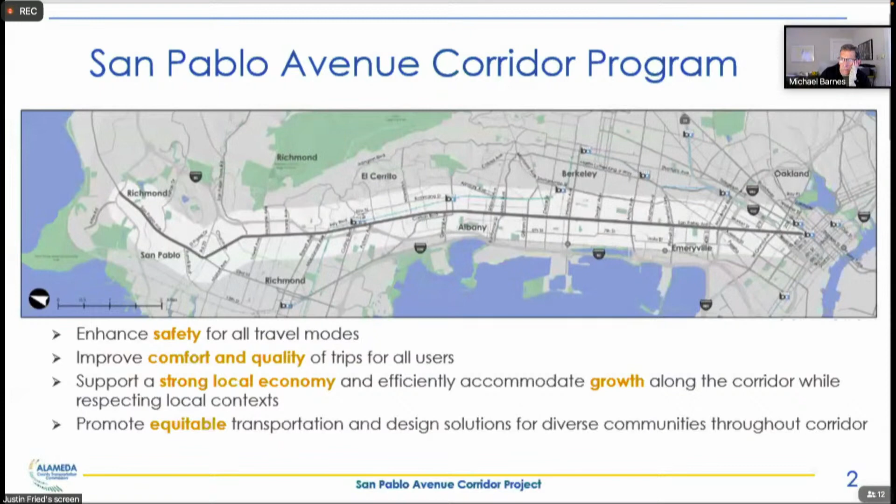So for a variety of reasons, San Pablo Avenue corridor has been a focus for Alameda CTC dating back to 2017. And Alameda CTC embarked on a bi-county corridor planning effort at that time. It spanned several years, had the goals listed below to improve safety, comfort, and quality of trips, support economic development, and promote equity. And this was a significant effort, involved visioning for the corridor throughout both Alameda and Contra Costa counties, considering a variety of cross-sectional options for the San Pablo corridor, multiple rounds of public engagement with over 4,900 people weighing in, and in April 2019, there was a public workshop in Albany and at the City Council, which staff helped support. So, next slide, please.

Before you go on, would it be possible to lower the lights in the room so the screen is easier to see? Thank you. Much better, thanks.

And so within Alameda County, there are a number of agency partners that Alameda CTC is working with on the San Pablo corridor, 4 different cities, AC Transit, the transit operator, and then Caltrans. Next slide, please. And so this graphic illustrates coming out of the multi-year corridor planning effort, there were 3 near-term projects identified that collectively comprise the San Pablo Avenue Multimodal Corridor Program. These are within Alameda County, and they differ by jurisdiction or by section of the corridor based on local preferences from that corridor planning effort, as well as technical considerations. And in March of 2022, Alameda CTC's commission adopted this corridor concept in these 3 projects as Alameda CTC's near-term set of projects to deliver for the San Pablo corridor within Alameda County within 3 to 5 years.

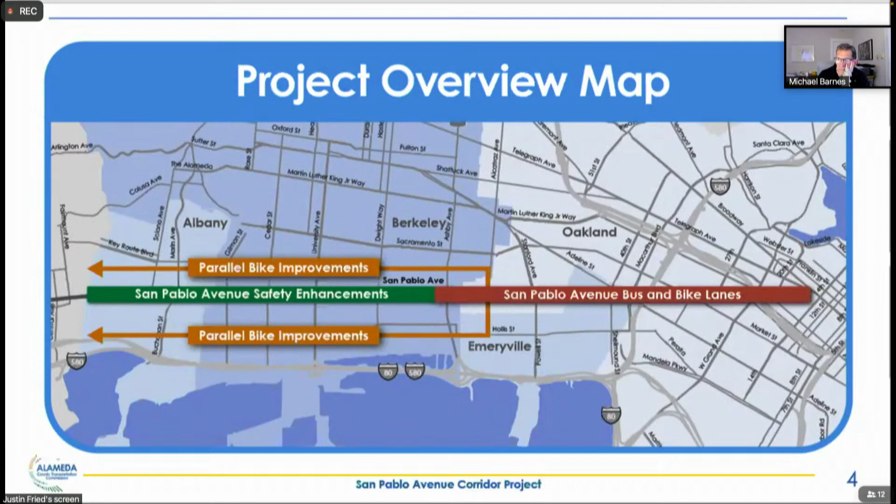And so at the southern end of the corridor, not within the city of Albany, the corridor concept calls for bus and bike lanes along San Pablo Avenue and repurposing traffic and parking lanes in order to put those on San Pablo through Oakland, Emeryville, and South Berkeley. At the northern end of the corridor in Berkeley and Albany, the proposed projects consist of safety enhancements along San Pablo to make it safer and easier for people to cross the street on foot and bike, as well as some targeted transit speed and reliability improvements. And then improvements to parallel routes to create continuous north-south neighborhood bikeway routes for all ages and ability cycling. Next slide, please.

And of course, this is not happening within a vacuum. There are a number of projects already underway at the local level across all of the different project jurisdictions. Within Albany, there are a couple listed here that touch the San Pablo corridor or the parallel bike routes. And so Alameda CTC's projects are coordinated with these, and we have either incorporated elements of the projects that the city had initiated and taken through concept planning, or in some cases, they're non-overlapping and they will work together to create continuous biking, walking routes.

Next slide, please. So I'll touch a little more on the scope elements of the 2 projects within Albany now, and just some of the details of the key locations within the 2 projects. So this focuses on the Safety Enhancements Project, which is, again, the project along San Pablo Avenue. And so this project's features include bus bulbs at AC Transit rapid stops to provide speed and reliability benefits for the buses and enhance space for passenger waiting.

Improvements at uncontrolled crossings of San Pablo Avenue. So there are a number of crossings with no more than a marked crosswalk today that this project would be looking to upgrade with pedestrian hybrid beacons or flashing beacons and median refuge islands. There are a number of locations where the project proposes to relocate bus stops from the near side of the intersection to the far side to improve the line of sight for oncoming motorists to pedestrians who might be crossing the street. When a bus is pulled out at the stop, it typically obstructs the line of sight for a near side crosswalk. At a number of locations, the project proposes to upgrade lighting at uncontrolled crossings so that pedestrians are not backlit for oncoming motorists.

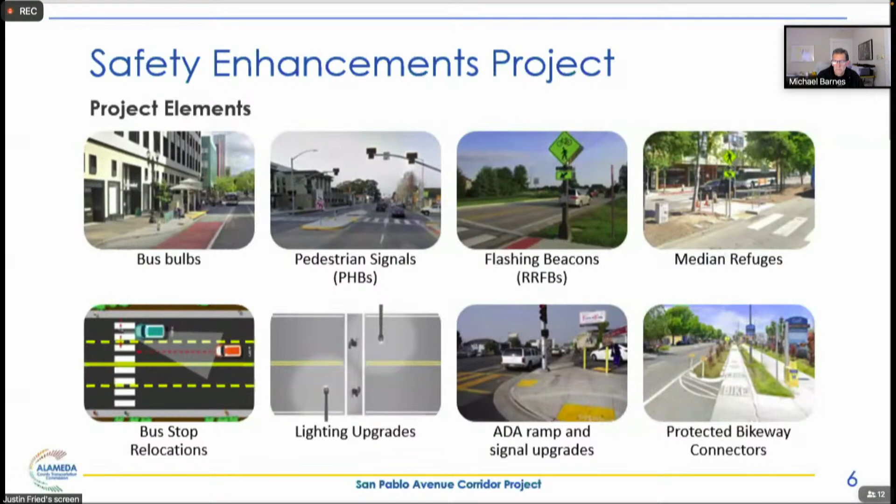Next slide, please. So I'll touch on a couple of the key locations here and just give you a sense of some of the design details of these locations. So this is the intersection of San Pablo Avenue and Marin. At this intersection, the project proposed ADA ramp upgrades, high visibility crosswalk upgrades, and then the project also includes elements to facilitate cyclists who are traveling along Marin Avenue accessing the existing two-way bike path along the south side of Marin, west of San Pablo.

So you can see in the figure a two-stage left turn box with a protected island to shield bicyclists that allows somebody traveling westbound on a bike along Marin Avenue to make that turn and get into the two-way shared use path along Marin Avenue in a comfortable way. Next slide, please.

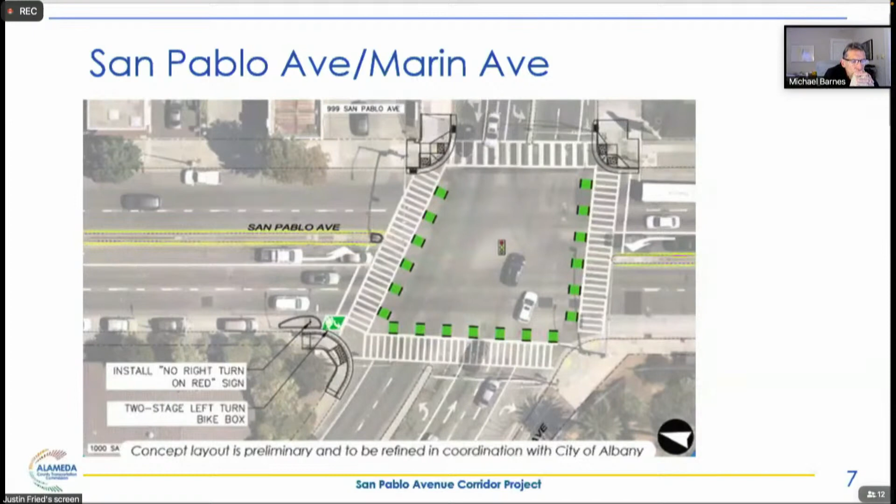This is the intersection of San Pablo Avenue and Solano Avenue, major intersection of two commercial corridors and a very high transit node, intersection of different transit routes as well. At this intersection, the project proposes ADA ramp upgrades with directional ramps where possible, high visibility crosswalk striping upgrades. And then this is one of the AC Transit rapid stop locations where bus bulbs would be constructed as part of the project. One of the key details with respect to the bus bulbs is exactly how long they are. There's a trade-off between length of stop, which provides operational flexibility for AC Transit, and parking.

And so we did do outreach to all of the different businesses here, and also in talking with AC Transit, there are some existing issues of the stops not being long enough, which results in buses sticking out into the intersection along Solano when multiple buses arrive simultaneously. And so based on the outreach and technical considerations, the bus bulbs are proposed to lengthen the stops, removing 2 parking spaces in each direction to provide more length of stop and address that issue of buses getting stuck in the intersection.

But I'll note this is somewhat of a compromise between the maximum length of stop that might be desired to consider all possible scenarios of future articulated buses running down the corridor. So we're really trying to balance transit operations and parking with this location. Next slide, please.

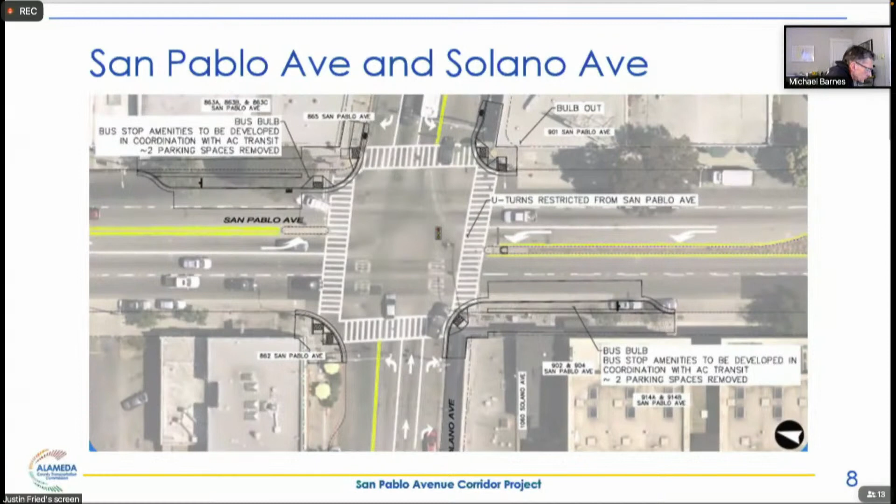So this is the intersection of San Pablo Avenue and Washington Avenue, and this is an intersection that the city has previously studied and the Transportation Commission has previously reviewed. And so the Alameda CTC project does incorporate a design based on past city planning and design work and direction from this Transportation Commission, which involves signalizing the east leg of Washington Avenue. Currently, one leg is signalized and one leg is not.

And then marking bike crossings and implementing signal phasing so that bikes who want to travel east-west along Washington Avenue but need to travel this short distance along San Pablo Avenue to make the connection can travel in phasing where they are not mixing with mainline San Pablo traffic.

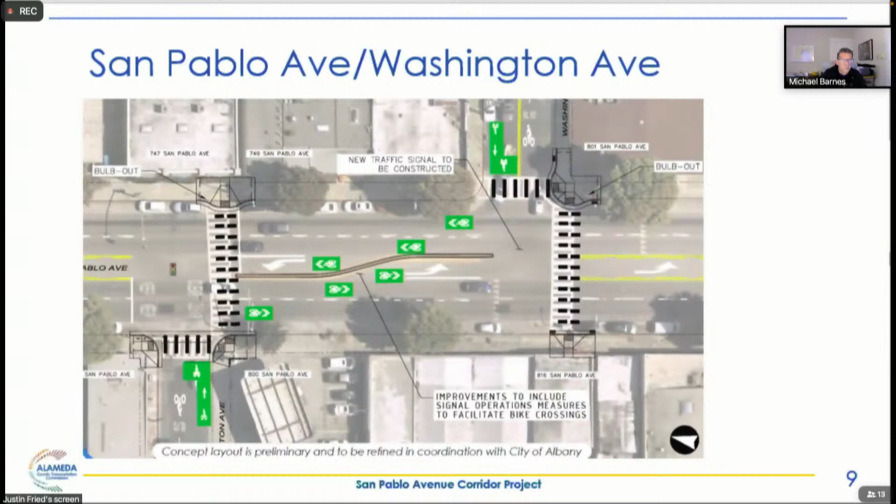Next slide, please. This location did generate a significant amount of interest in the different outreach that we've done as part of this project. I know a couple of you were able to attend the community open house that we held and have given input through other forums. There was some desire for a protected bikeway style design here, a class 4 either on the west side or the east side. We did consider it, and

we are recommending the design option that is consistent with past Transportation Commission direction and has actually already been vetted somewhat with Caltrans. Justin could talk more about this, but there has been some field testing with Caltrans staff regarding that signal operation to verify that it could work. The class 4 option, we did consider it, and there are just a number of challenges related to available width along San Pablo Avenue to fit a two-way bikeway, as well as just driveways and parking demand.

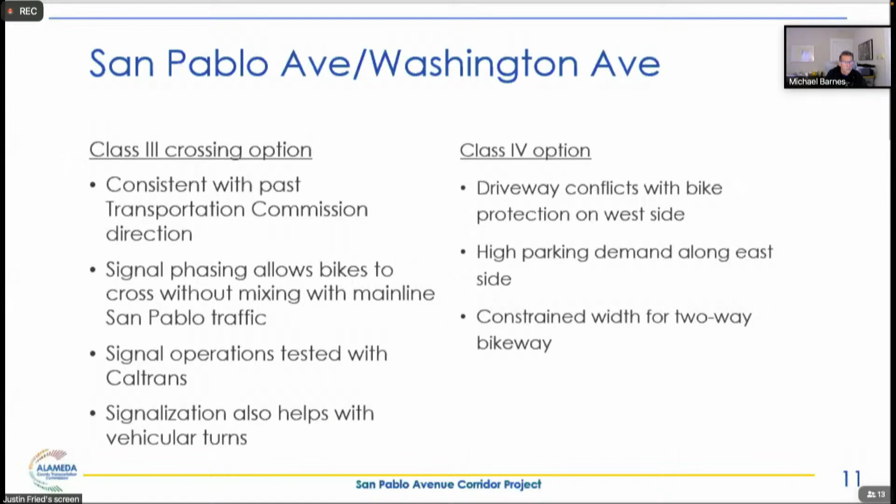Next slide, please. And then this is the last location I'll focus on as part of the Safety Enhancements project. So this is the connection between Brighton Avenue and Clay Street. This is a somewhat longer offset bike crossing than the Washington one. And at this location, the proposed design includes class 4 bikeways along San Pablo Avenue for this block between Brighton and Clay. The land use is fairly supportive, with one side being a large, pretty much single use with a large surface parking lot, and the other side being the Albany Bowl redevelopment site. And then the class 4 fits well within the parking lane and works with sort of the existing signal operations.

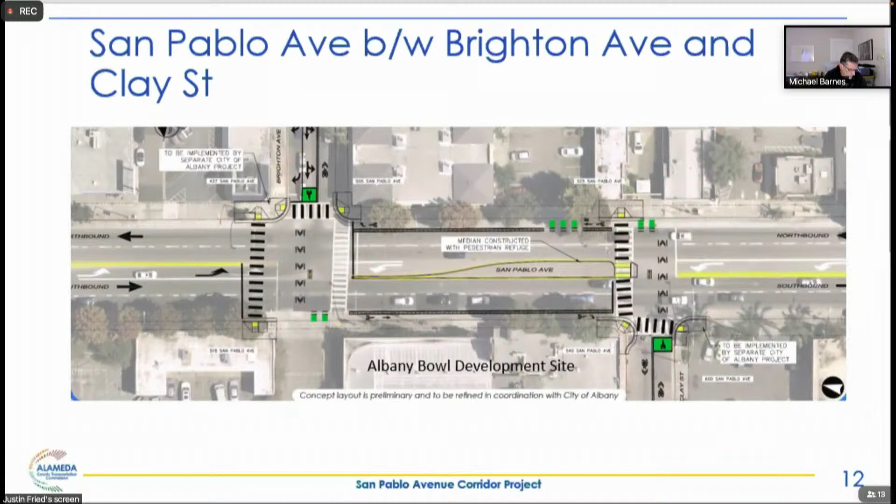Next slide, please. And this was another location where there was a lot of interest as part of the public outreach that we did. There was some interest from community members in pursuing a two-way protected bikeway design on the Albany Bowl side, similar to what the city has already implemented in front of the Sprouts north of Dartmouth. We did review that, but there were, again, some challenges with just the available width to fit a class 4 within the parking lane. And then the design in front of Sprouts actually used some of what was previously the sidewalk width, but that would pose a number of challenges just in terms of tree and utility impacts. So that's why we are recommending the one-way class 4 design.

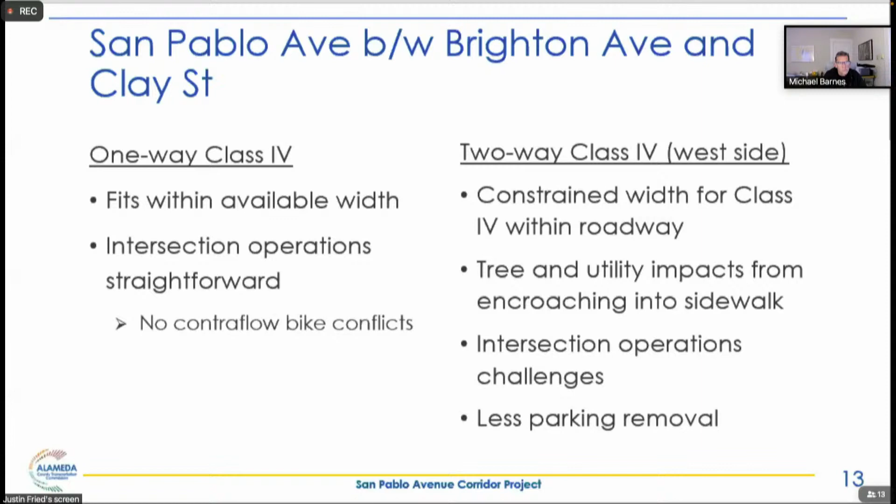Next slide, please. So I'll shift now to the parallel bike project. And this project, again, consists of improvements not along San Pablo, but along sort of north-south streets that provide access parallel to San Pablo itself. So this project includes scope elements like traffic calming elements to manage volumes and speeds along neighborhood bikeway streets. At major street crossings, so these arterial and collector type streets, the project would install treatments such as median refuges or flashing beacons to assist cyclists in crossing those major streets.

And then the project would also include wayfinding, ramp upgrades, some changes to stop controls, and then bulb outs at some of the major street crossings. And this project, again, is in Albany, Berkeley, and actually a portion of it is in North Oakland as well. So some of these elements are not present within Albany.

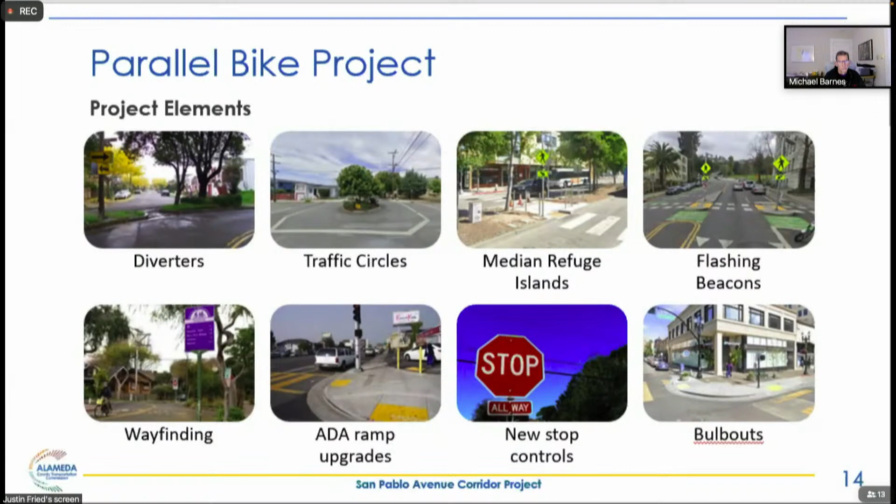But that has some benefits of left turners not being in conflict with pedestrians and cyclists. And I'm sure we've all experienced trying to make a left turn out of a residential street onto a major arterial is a difficult task for a driver, and trying to also spot a cyclist or a pedestrian at the same time just adds to the complexity. And then the median also allows pedestrians and cyclists to cross in 2 stages.

And then in addition to the median island, the proposed design would include a pedestrian hybrid beacon, which would fully stop traffic and give pedestrians and cyclists the right-of-way when crossing. We are anticipating, given the proximity to San Pablo, that the ped hybrid beacon will need to be interconnected with the San Pablo Marin signal so that it doesn't just immediately stop traffic and cause backups to San Pablo, so that they work together in terms of coordinated timing.

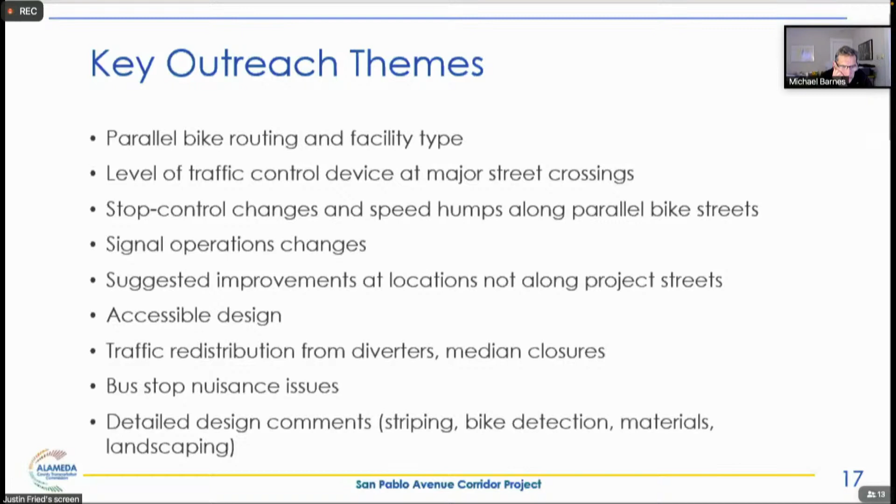Next slide, please. So our next steps, as mentioned, we're currently presenting to the transportation commissions and ultimately councils in Albany and Berkeley and seeking an approval of the concept design. Once we get that approval, we'll be moving into environmentally clearing the projects through both CEQA and NEPA. The safety enhancements component, which is the on San Pablo portion, will require what's called a Caltrans project report, which is their formal approval of the design of the project, and then we'll be moving into final design. Next slide. And this is just a summary of the schedule for the two projects.

We've been very fortunate to be successful in bringing in $44 million in grants combined between the safety enhancements and parallel bike projects, a mix of different state and federal grants. So we're in a very good position from a funding perspective, but that also means that these projects have committed schedules that they need to be implemented by now to meet grant requirements.

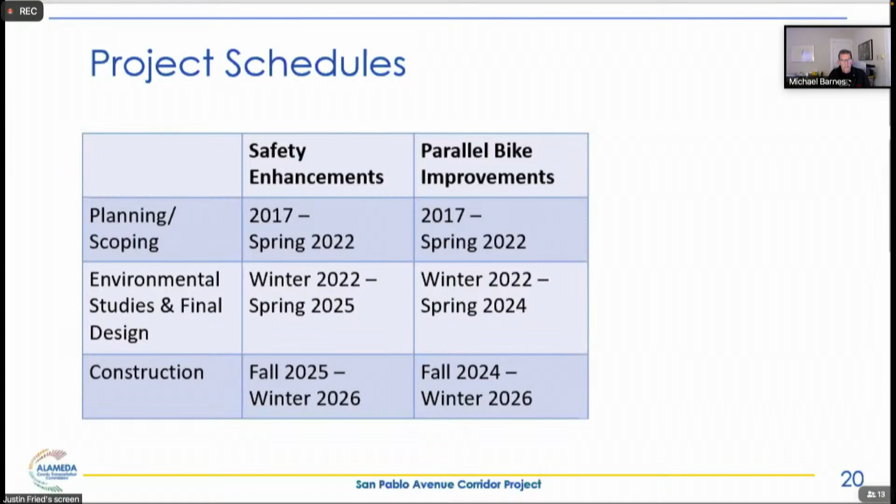And so the parallel bike project, we are expecting to have ready for construction by fall of next year. And then the safety enhancements project would follow after that, just due to the Caltrans process. That takes a bit longer. Next slide. And so I'll conclude with the action that we're seeking tonight from the Transportation Commission.

We are asking that the Commission recommend that City Council approve the conceptual design for the two project components that were discussed, the safety enhancement and parallel bike improvements, which are the two components within Albany, and then direct staff to continue to work with us as they've been doing so well on final design and implementation.

And the purpose of this action is really to just establish the basic project features and types of facilities before we enter the environmental and final design process. Again, this is a grant-funded project with kind of set funding and schedule. And we've done a significant amount of outreach to get to where we are tonight.

So we're definitely interested in the input from the Commission, but we're also really hopeful we'll get this approved tonight so we can stay on track for implementing these important projects. With that, I'll wrap up and happy to take any questions.

Thanks. That was a really great presentation. I appreciated how you covered every important point and moved through it all very efficiently so that we can move on to questions and discussion. We have lots of time for that. I know I'm going to have a number of follow-up questions about some of the details that you touched on. So let's plan to take some time with questions.

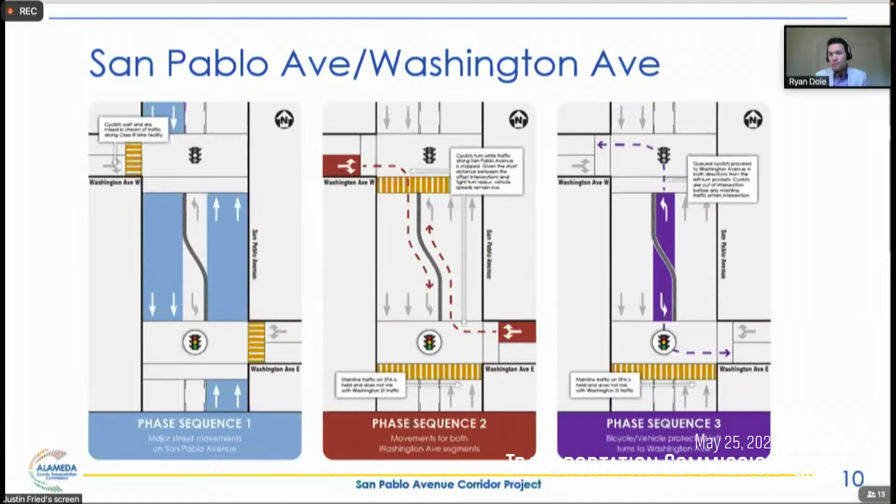As I'm kind of pondering on it right now, nothing's coming to mind that potentially would restrict it. So it is something we could explore, but we haven't actually discussed to that detail yet. Okay, thanks. There aren't any exclusive bike phases that would necessitate the use of a bike signal.

Okay. And my final question is about you mentioned that some alternatives were considered, and I think some of those I learned about when I read the 2018 meeting notes from a time when I believe I was on the commission and should remember, but it was really good to go back and see it in print, so thanks for digging that up for us.

But one idea that I didn't see mentioned in those notes was the possibility of an east side cycle track, which would necessitate removing maybe 5 or 6 parking spaces along the east side and providing a fully protected bikeway with no additional signal head at the southern intersection of Washington and San Pablo. So can you talk about some of the reasons why that was ruled out?

I can start, and Justin, you can add. So whether it's on the west side or the east side, width is a constraint. The parking lane is 8 feet wide, and the minimum width for a two-way protected bikeway is 8 feet, and that's not including the buffer width. And actually some draft new Caltrans design guidance that's been floating around and maybe adopted earlier this year would increase the minimum width to 10 feet. Plus you need a couple of feet for a buffer.

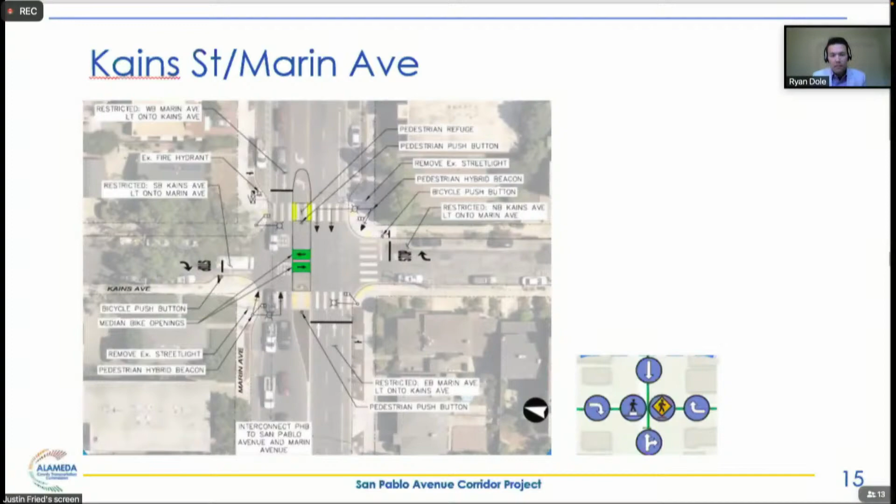If I might ask sort of a connected question, then would that lead us to considering putting the mast arms, or the poles anyway, on the median rather than at the side of the street? So that if we change the curb line at the side, it makes no difference if the poles are all in the median. I think that could be an explored option.

Just something to consider. I mean, we can move poles. It's not that it's impossible to do. It's more money to do it later versus setting the poles back further so that they would work with either the existing or future curb line. But I'm just throwing out a different alternative, which would be to just put them in the median on the presumption that the median's not going to move. And there may be other considerations, so I'll just leave it there.

Okay. Any other questions about this location? Michelle, I'm kind of counting on you to see if Michael ever speaks up. Doesn't have his hand raised right now. I'll watch. And let's see, another location that might warrant some questions is the northern intersection with, is it Brighton, Clay area? Any questions about that? Okay, I don't see any. I don't have any other specific intersections in mind. Is there another specific intersection that people want to ask questions about? Are there any general questions that are not specific to an intersection?

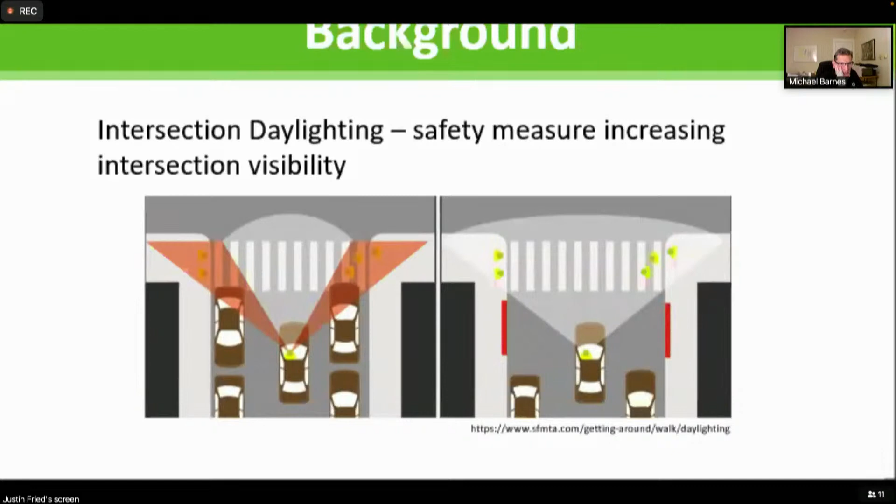So briefly as background, typical national guidance on this is restricting 20 to 25 feet of curb from marked or unmarked crosswalks. The California Manual on Uniform Traffic Control Devices doesn't specify for general parking, but does call for a 20-foot minimum no parking zone if parking spaces are marked. So where we actually mark individual spaces, that's the guidance. Other red curb applications at intersections exist and are related to infrastructure access. They're implemented under the City Engineer authority for storm drain access or other parking regulations like no parking near fire hydrants.

The 2017 resolution and guidance, in the city guidance, distinguishes between the approach and departure sides of an intersection, identifying preferred distances of 20 and 10 feet respectively, with flexibility to reduce further if determined to accommodate a vehicle parking space, and to increase further if the remaining curb length to a driveway does not accommodate a vehicle parking space, to clarify where parking spaces are allowed. As I understand it, the greater length of parking restriction on the approach side addressed the increased vulnerability there due to the closer proximity of an approaching vehicle to the crosswalk approach from that direction. And the policy also identifies that intersections with geometry or topography constraints are to be analyzed individually for visibility treatment.

The resolution and the guidelines also detail a process. It provides prioritization criteria for where to start with implementation. Proposals for each intersection are then to be reviewed by the commission at a meeting noticed to owners and occupants within 150 feet walking distance. And after that, the city engineer makes a final determination on implementation to proceed. Implementation of this guidance to date has been accomplished in one of two ways: through city projects that involve engineered plans and through standalone implementation following the established prioritization.

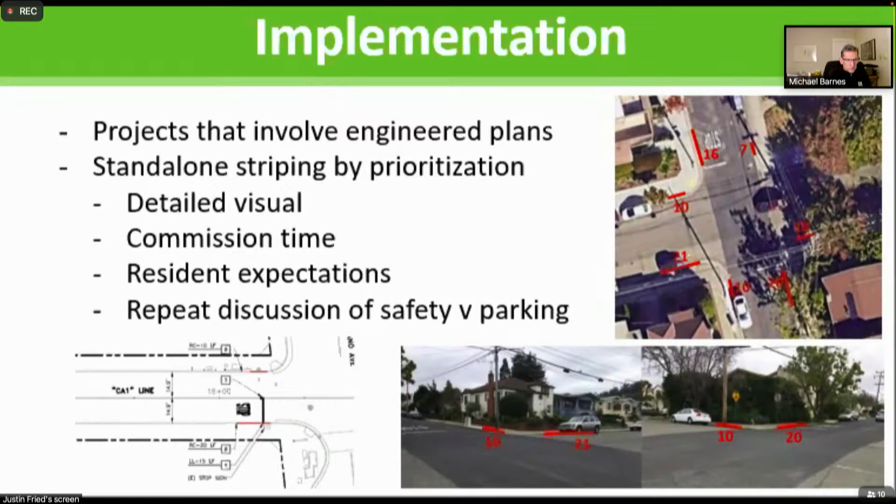So the proposed change keeps the same requirements in terms of the curb length, with the same flexibility in application of those to accommodate a vehicle parking space where small adjustments in the length can be made, while clarifying the process and changing the process and implementation.

It changes the language from guidelines with proposed requirements to a council policy that details the application of intersection parking restrictions. It removes the prioritization criteria and commission review, placing implementation under the city engineer's municipal code authorization to restrict parking at hazardous areas. And it changes the public notification of a meeting to review the proposal to a public notice of the change before it's implemented.

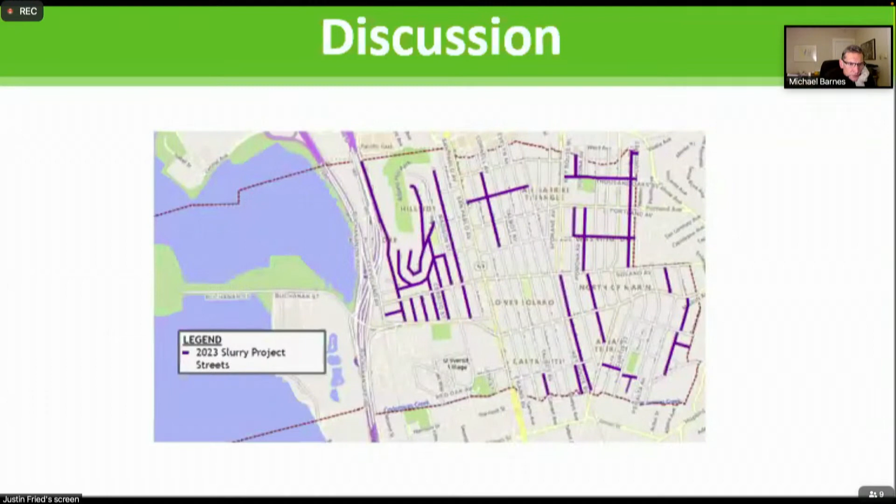This is intended to clarify that the policy is intended to be implemented citywide and makes changes to the process to reflect that. This change would allow for much quicker implementation of the safety measure, than we've been able to do to date, making it feasible to incorporate into broader roadway maintenance, such as pavement resurfacing and striping projects. And with that, staff's recommending that the commission recommend to City Council approval of the proposed council policy for restricting street parking near intersections, and I'm happy to answer questions on that.

Any questions from commissioners? So after notification, is there an appeal process? Not as proposed. It would be the city engineer's decision to implement and notification to the public before a change is made. So then it kind of gets covered under the standard complaint of the city council? General? Okay. Yeah. If someone wanted to disagree with the implementation of the policy, that would be taking it to council. Okay.

So I guess a question to follow up on that is if the public notice defines a comment period, then that's time within which they could appeal directly to the city engineer to refine the design. I don't know if that's built into it now or if there's really interest in doing that. Obviously, as an engineer, I want to make sure that I'm hearing all the concerns before I make a final decision. If you want to do that, put a timeline on it that would say the city engineer will entertain any comments received within some time frame, and then their decision will be final. If there's any big changes, it might involve renoticing, which is more work.